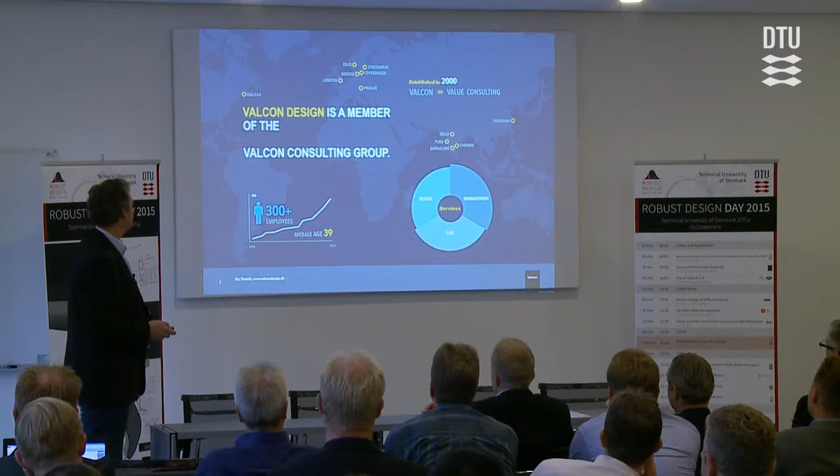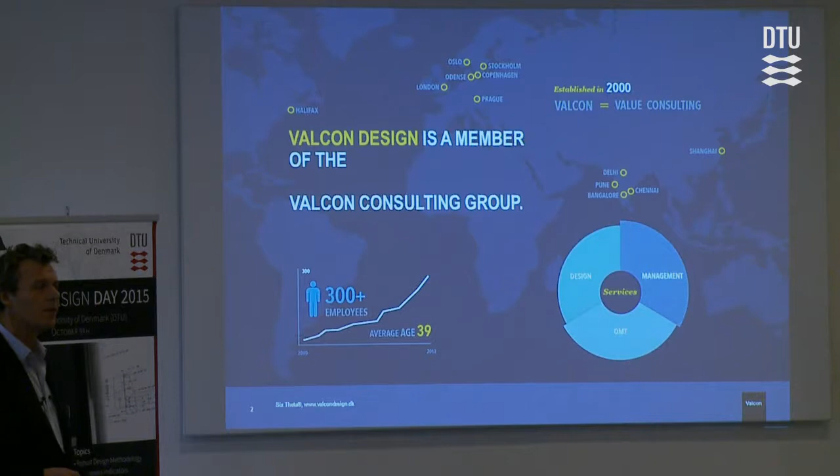This is just very shortly the company that I'm from. Valcon Design is a member of the Valcon Consulting Group. We are 300 people, and we have three divisions. We have management consulting. This is why we are talking so much about trying to measure how good design is, because that actually makes it controllable. Then we can manage it, scale it, train people. And then we have the design department where I'm the head. And OMT, that's another story. They are making ships. I'll not talk about that right now.

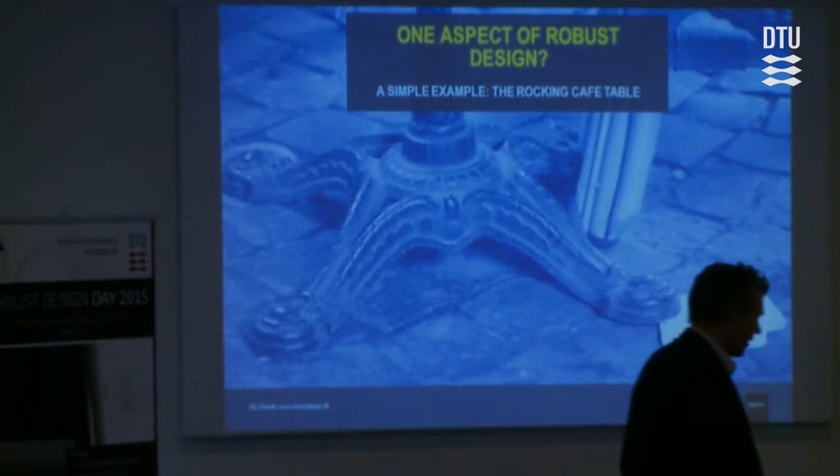Just one little teaser here. Maybe everybody has seen it, but each time I see it, new things are coming up. Because in this little example, one aspect of robust design that I have found is extremely important, I'll not say it's everything, but it's close to, is over-constraints. When we have over-constraints in a design, suddenly we have this situation. Let's assume we had zero production tolerances. Then we could assume we have no problems.

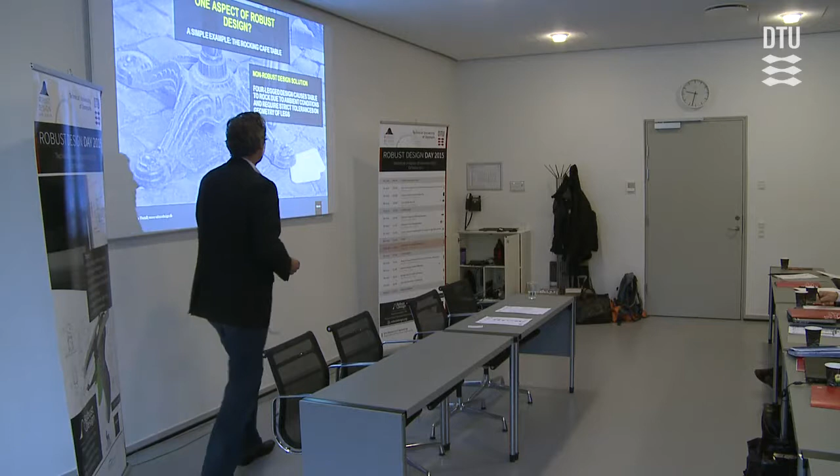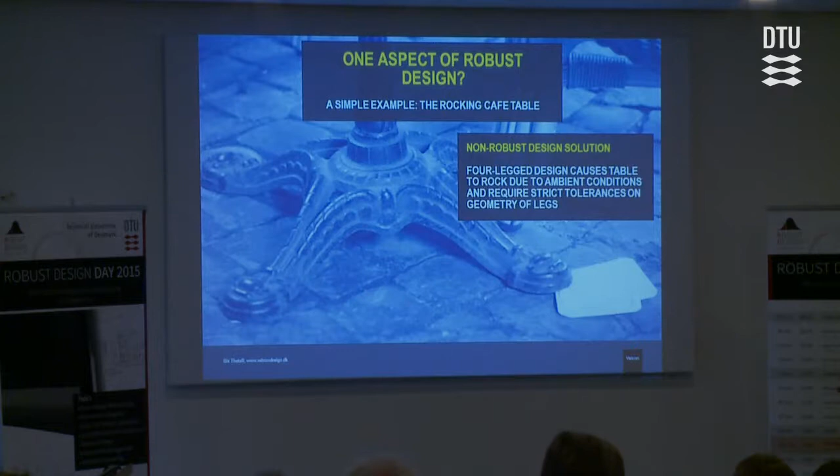No, we don't, because what Thomas is talking about, load deformation, thermal variation, all this stuff will actually try to make this different. And then we have this situation. And we all know it. Each summer we need to put something new in. They're changing all the time. From a robust design perspective, this is a non-robust design solution. It's born like that. No analysis, no simulation, nothing can remove it. It can improve it, but it cannot remove it. And there's a huge difference there.

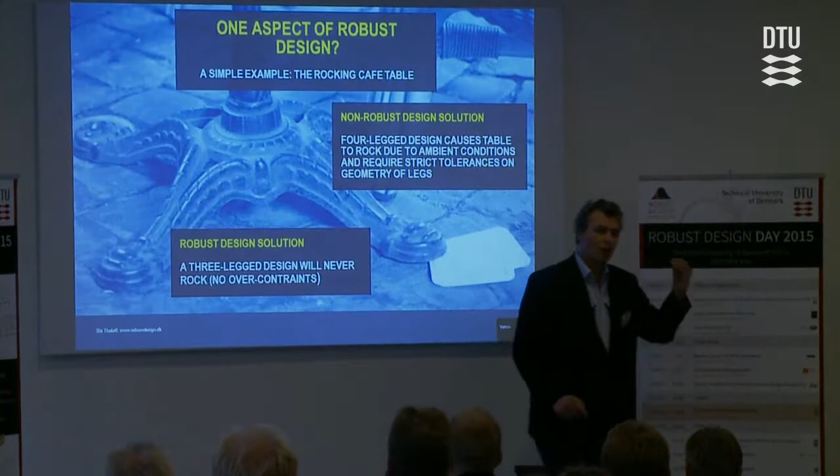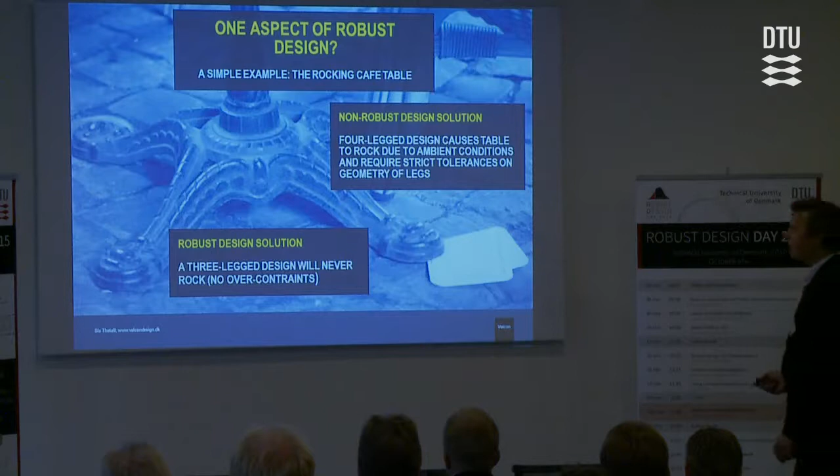So what I'm talking about now is really digging into the over-constraint part. For one, it's simple. You don't need to calculate anything. But it has such a big advantage. So I want to look at one example of over-constraints and how that looks. If we look into such a product in low volume, I would expect that we have a 100,000-leg table. There are so many over-constraints in such a product. My argument is not that we can remove all of them, but I would assume that we can remove around 90 to 95% of these over-constraints.

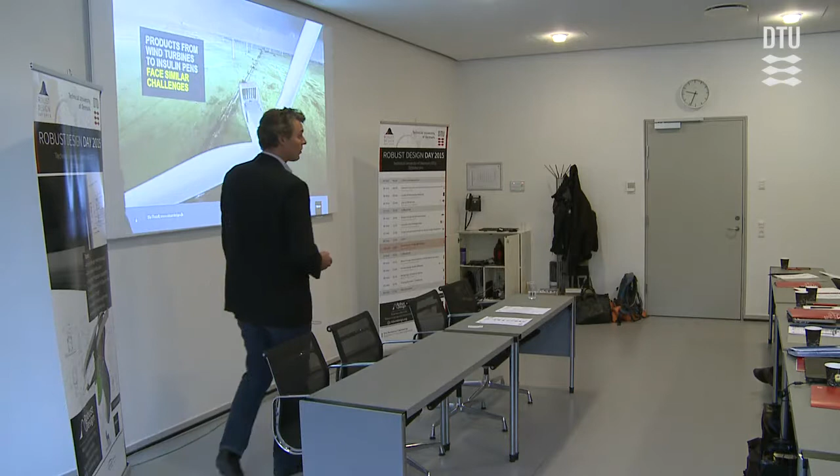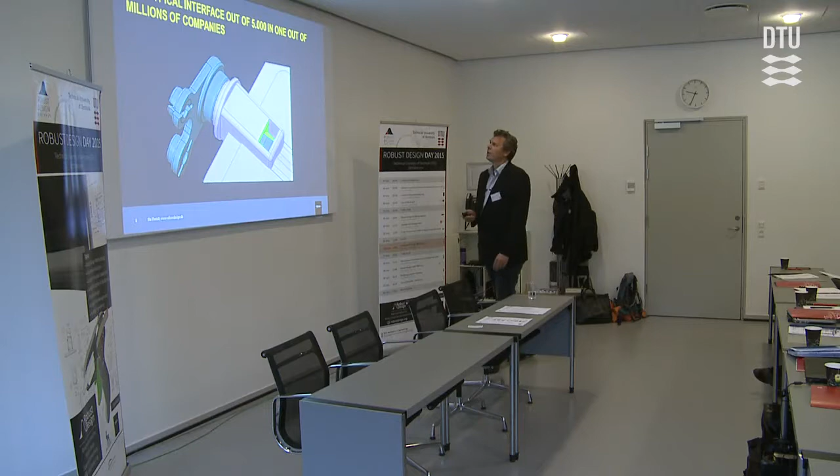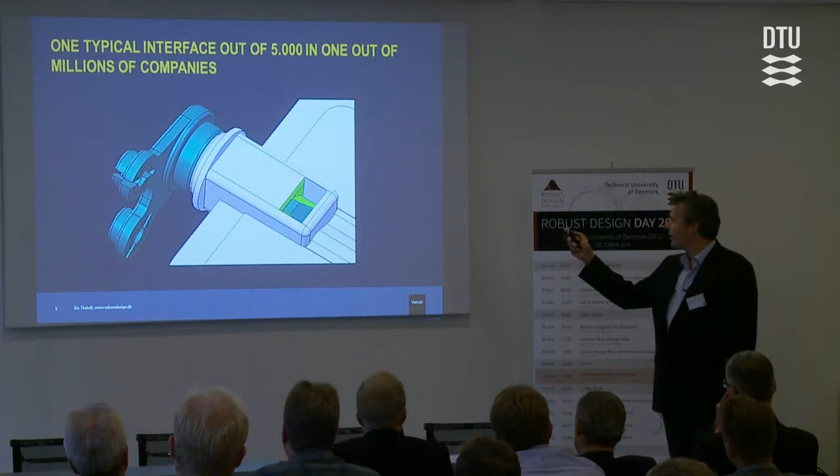Let's dig down to one single interface between two components weighing approximately 5 grams. It's in an automotive company. They're producing 5,000 interfaces like that a year. And I would say it's one out of a million or even more. This is how their design looks today. I have the two components here. I have painted all the surfaces green. These are the surfaces that we need to control to better than 5 hundredths of a millimeter to actually have a good product here.

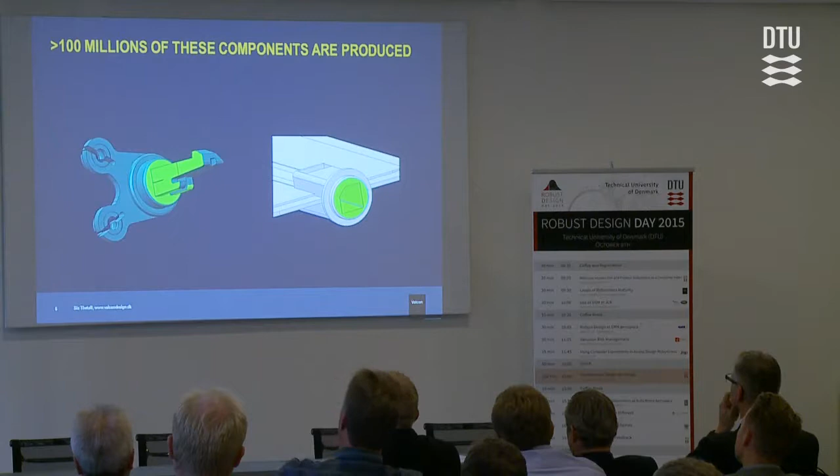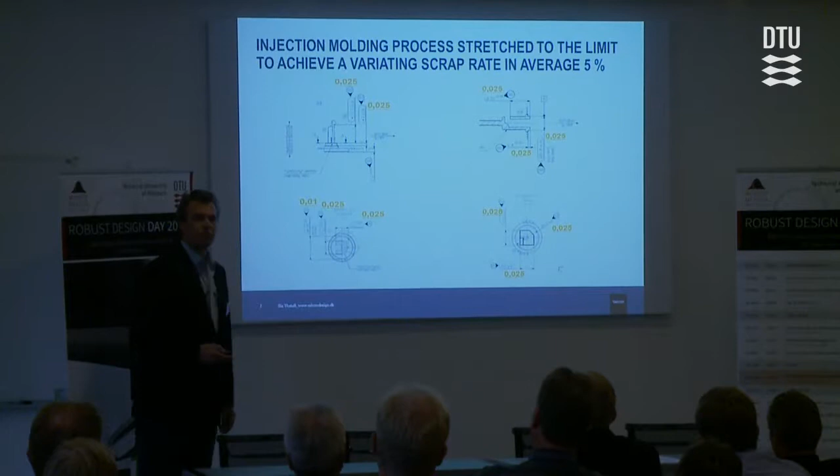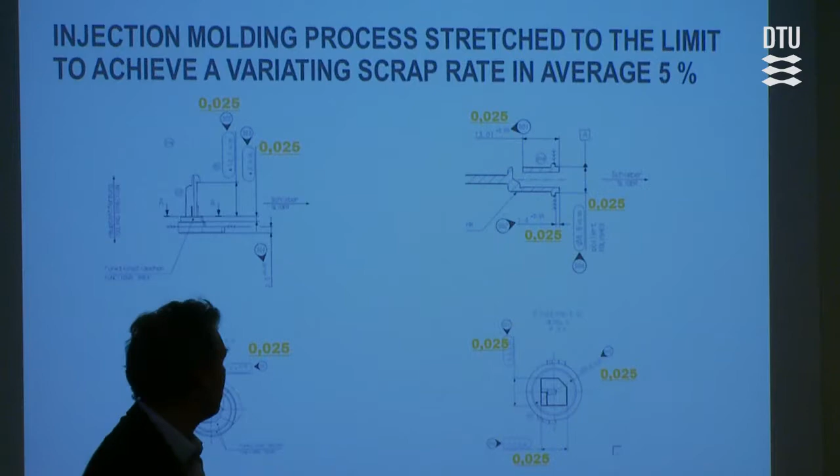Let's look into their drawings. These guys are amazing at production. They are stretching injection molding to a level that I have never seen before. They are able to produce 0.025 millimeters on 10 millimeters in injection molding. Steady production. What they achieve by doing that is a varying scrap rate, on average 5%. That is not a good situation to be in.

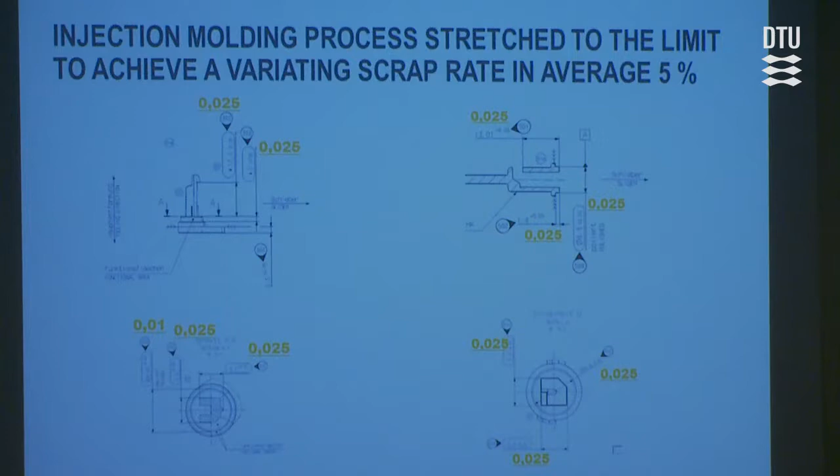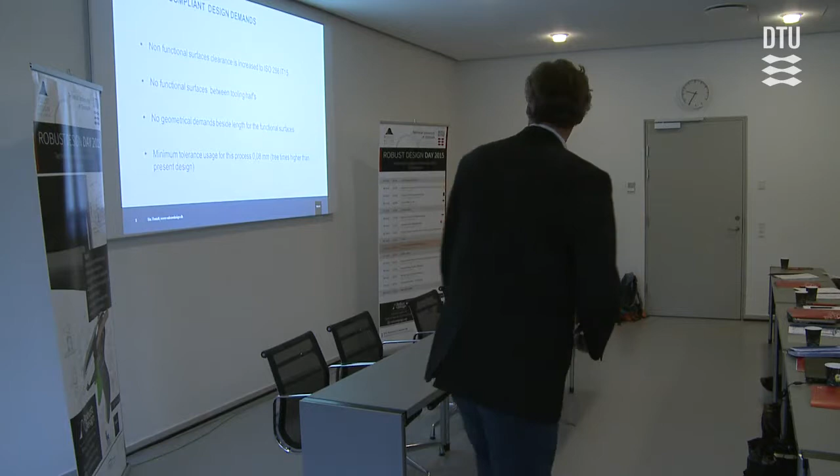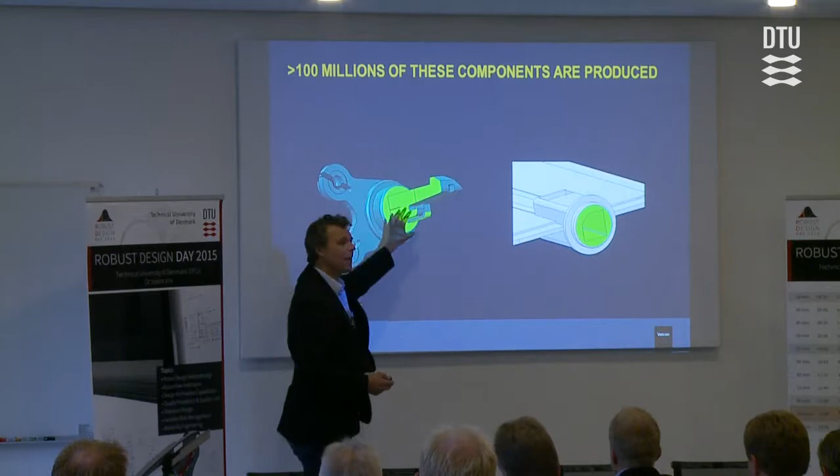Let's look at how this could look from a design perspective. Let's not do any simulation. Let's not do any calculation. No, let's change the way the design looks, because that is what's needed here. No simulation can change these two parts because they are simply wrong. So they have not deserved any analysis, they have not deserved any simulation, they need to be changed. And this is what we do before we start simulating.

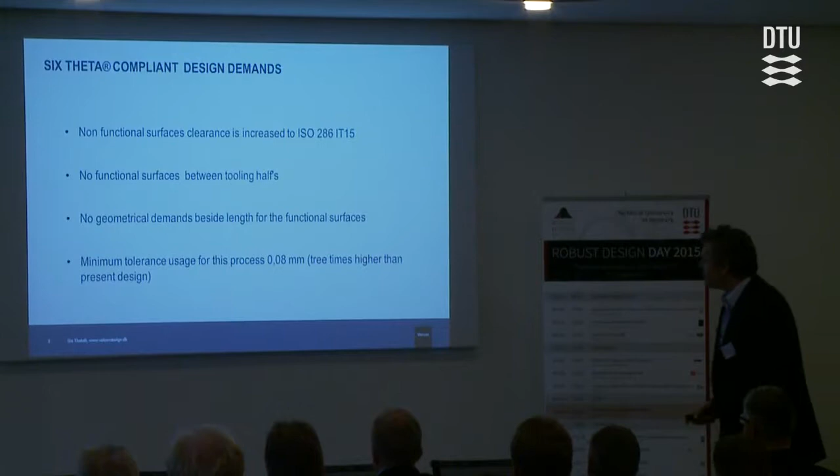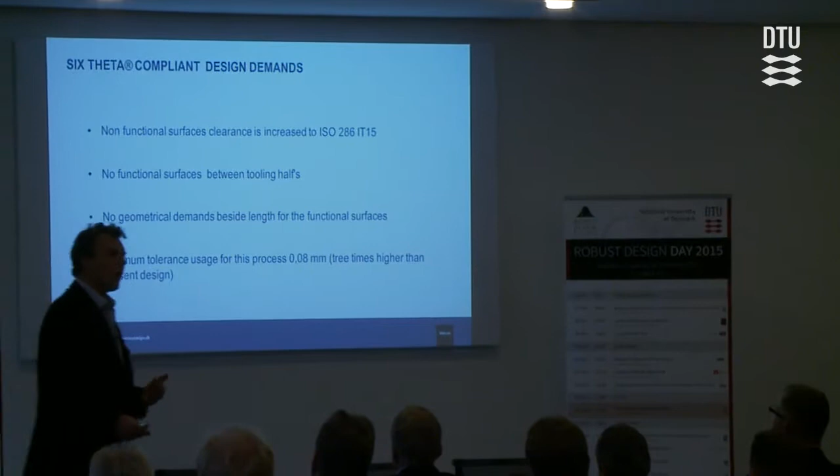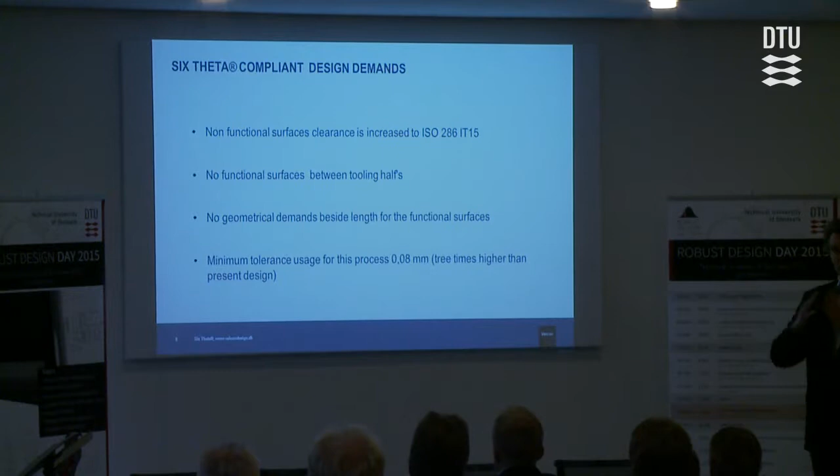So let's set up a specification, because we know what we want to end in. We know what the specification of an injection molding is, we know how that is looking, we know what is easy to produce. So why start designing before we actually know what the result should be? Because we know that up front. We need that all surfaces which don't touch each other, all the non-green surfaces, should actually be to IT15, because that means that we have no quality control on this.

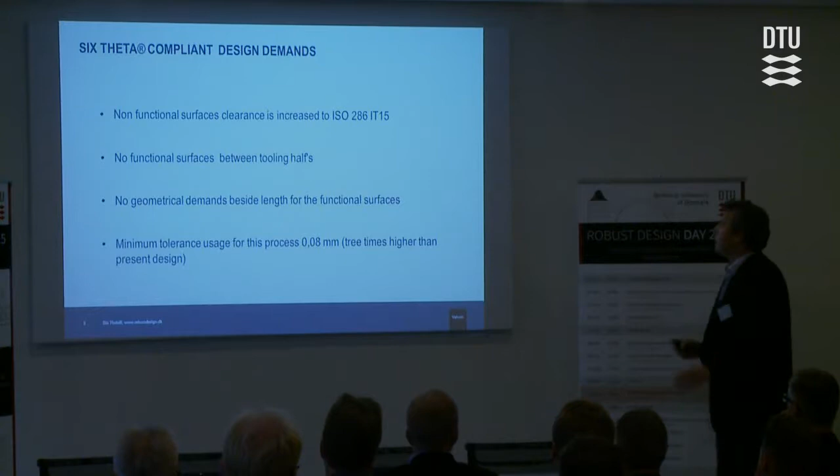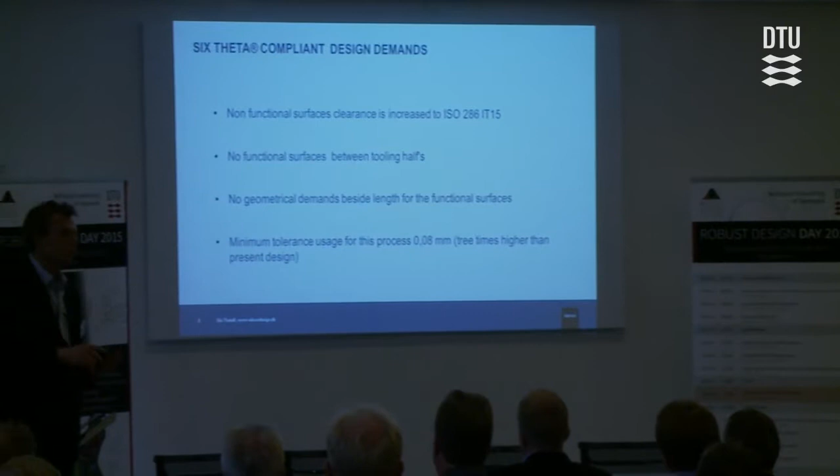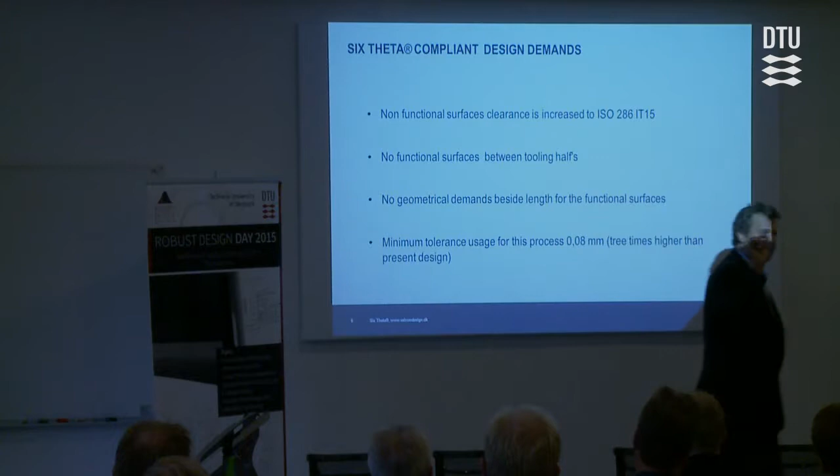There should be no functional surface between tooling halves. Tooling halves in such an injection mold actually have clearance, meaning that we will have play inside. So that is not a situation. We know that from the beginning. There are no geometrical demands beside length. We all know these GPS measurements where you have the roundness, the planarness. It's beautiful signs. They're very complicated. Let's have designs where we don't need any of these.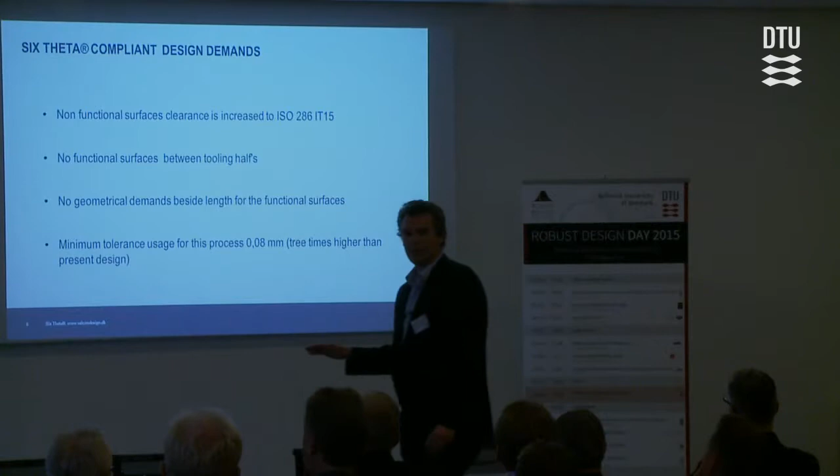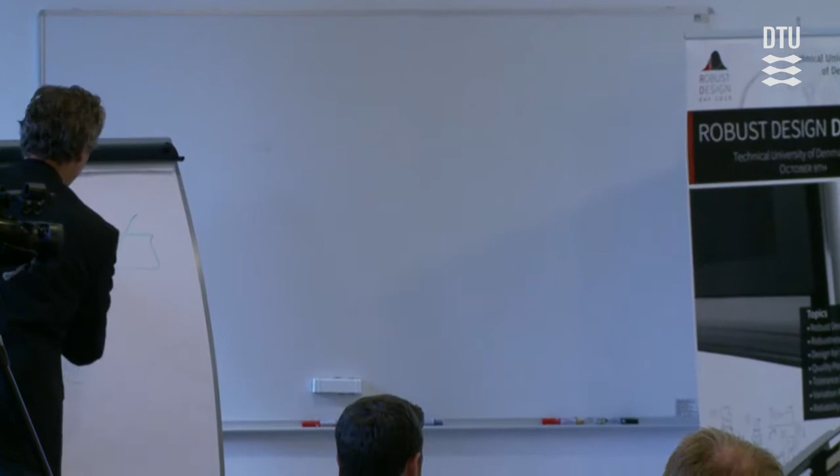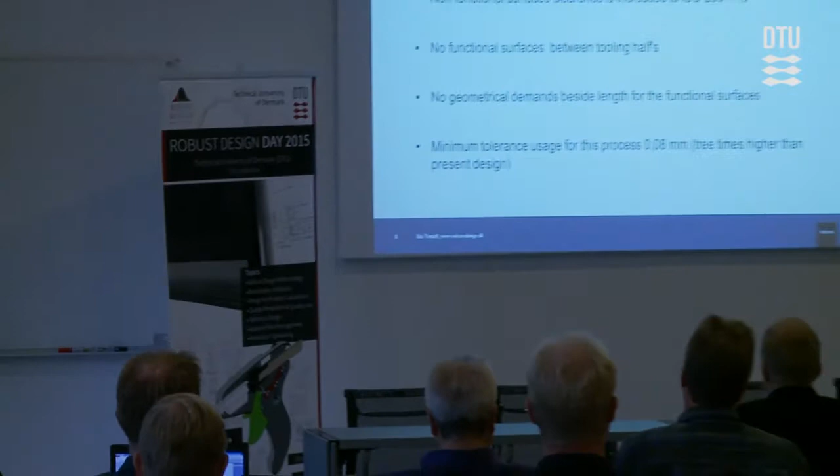Each time I see a design, each time I see such a thing, I'm glad I can read it. Flatness, this one, there's a lot of these signs. Let's just get rid of them. Let's use them where we want, but let's make designs where all these are non-needed. So this is the goal for the design. Let's look how this looks. This is how it's looking.

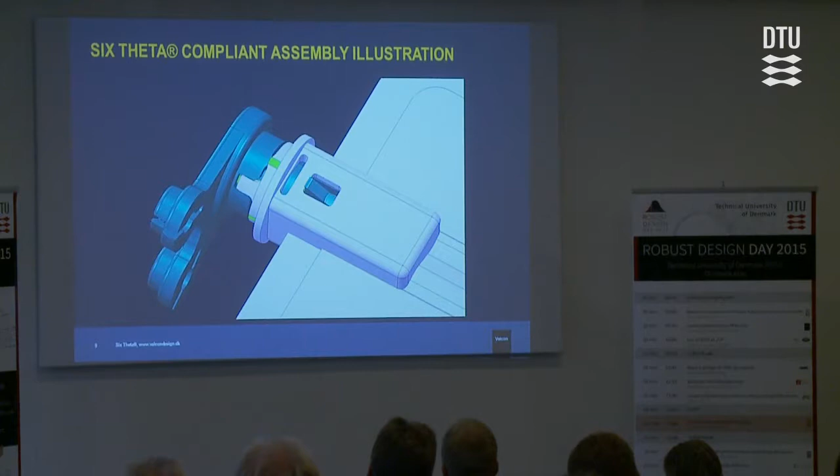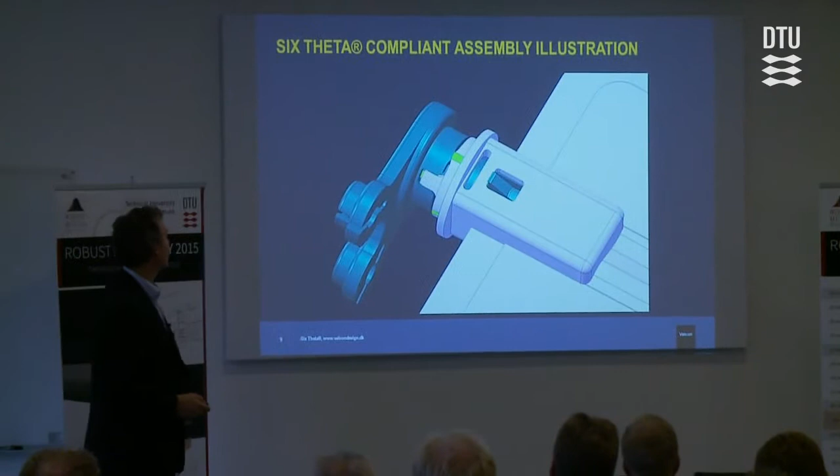So this is a compliant solution, and back to your KPI, this is actually a solution which will score very, very high. It will be insensitive to temperature, it will be insensitive to load deformation, it will have a totally different story of tolerances. But I will come back to that. This is the part we had on the left side, which was demanding all these tolerances. This is the part on the right side.

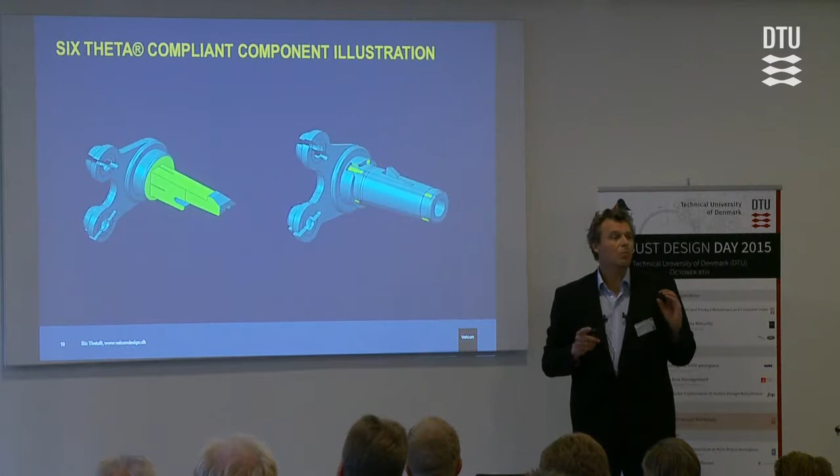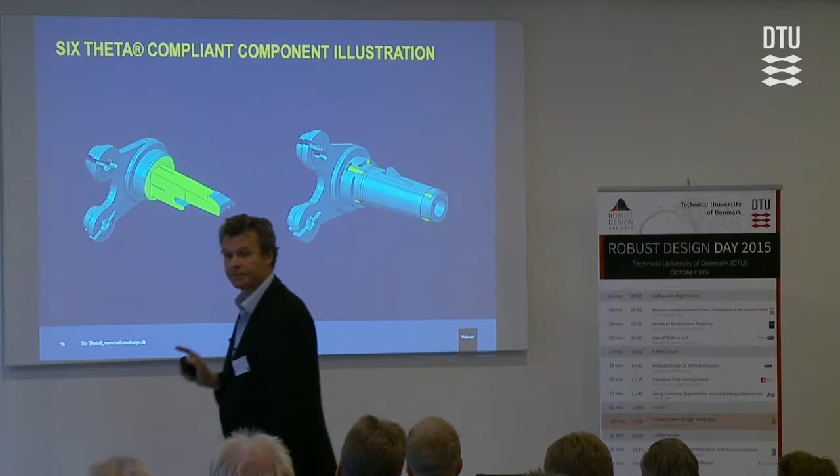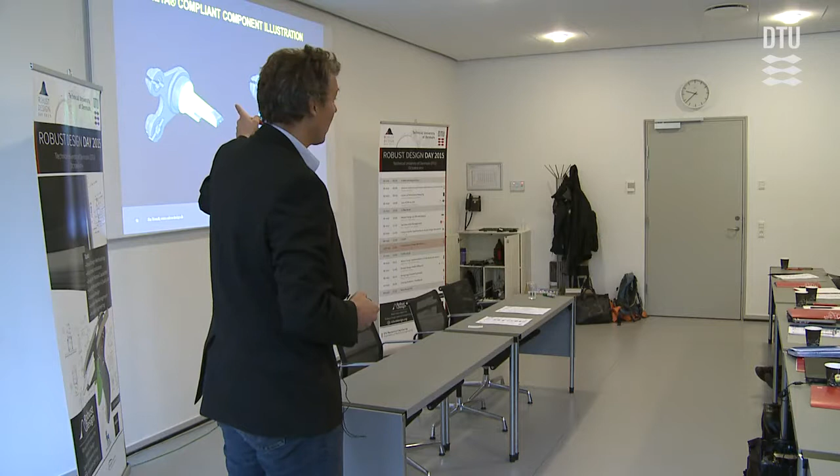Now look how small the surfaces are. If you look into a Lego block, they are there. I would claim that everybody thinks that Lego is the best in the world due to their production. I would claim it's due to this. I'm not sure they can produce the tolerance I just showed you in this automotive company. I'm not sure about that. I'm actually sure that they don't need to do it because they have such a beautiful little dot in their Lego block. It's a beauty. Can't help them. They're just damn good at it.

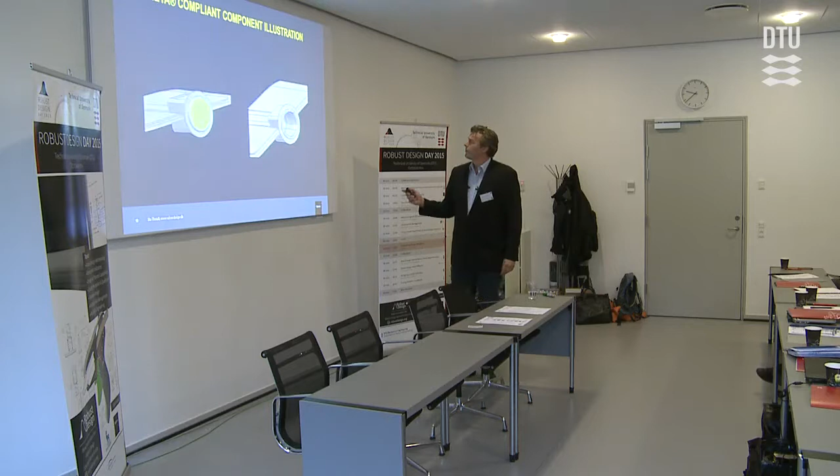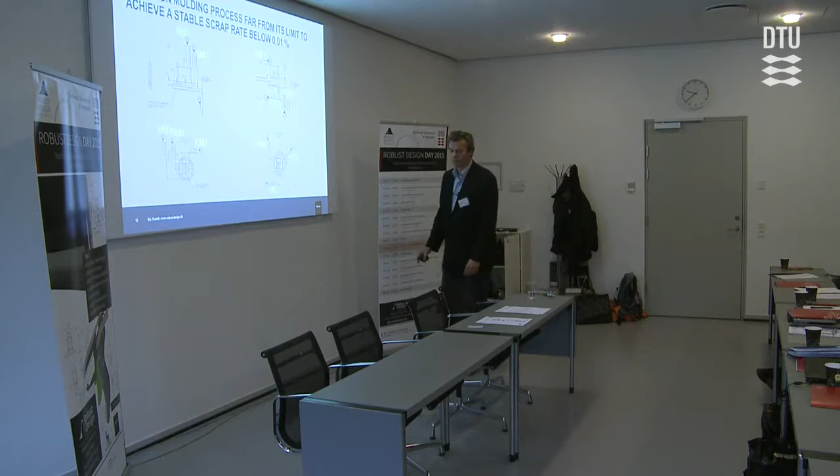This is the next one. On the left side, we have the original. On the right side, we have the other one. Let's look at the drawings now. This is how it's looking. We haven't made any simulations. And we have now a situation with the scrap rate below 0.01, and we have tripled the tolerances.

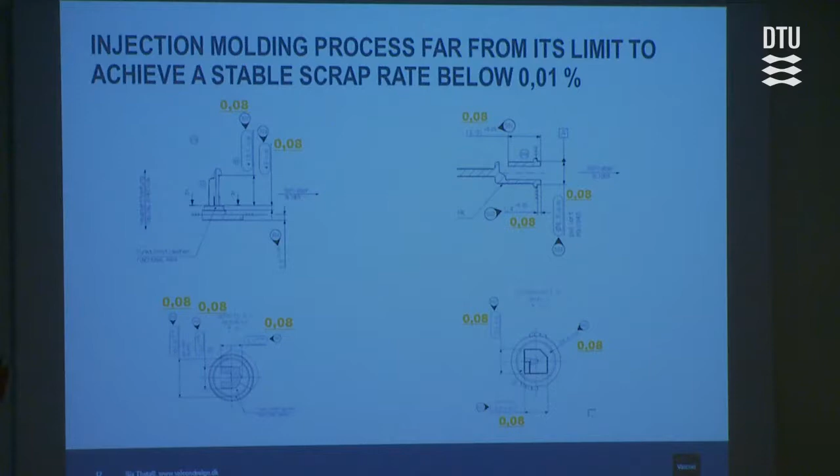This is live. And when we then start looking at how the components are out there, how the components are in general in the industry, because this is just one example. In this company, this is average, how the components are looking. This is just another example, an old example, I've made them myself, of how components are looking when we design it this way.

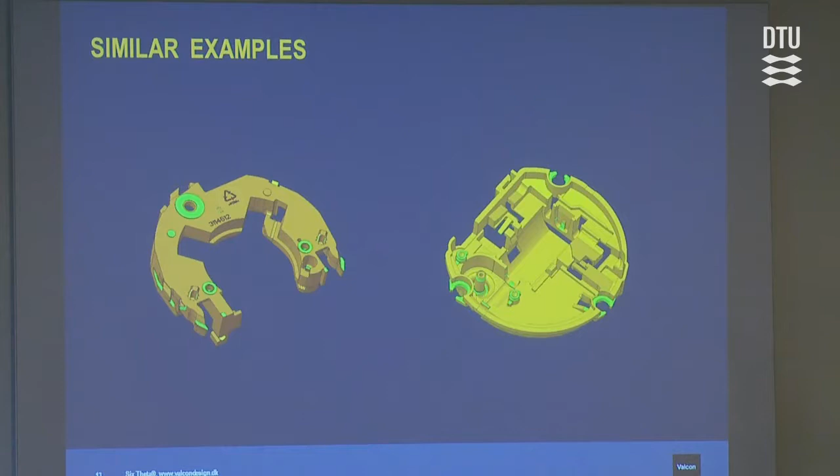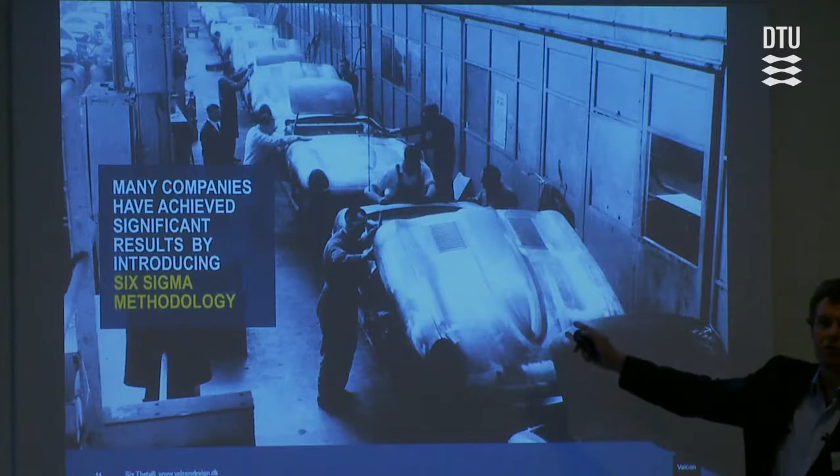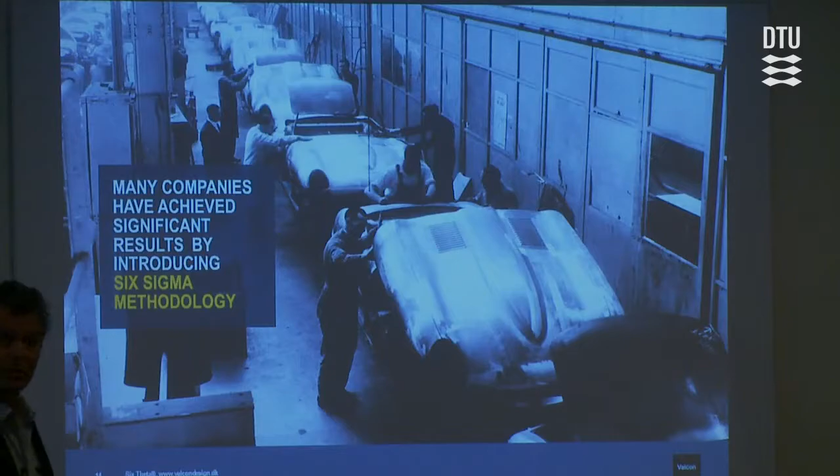If we look into the companies, we can have huge results of implementing Six Sigma where we really bring down the variance. Huge results. And it's very effective, and we should do it. Personally, I don't like the discussion of whether it's this or the other, because it's both. But you could imagine that, back to this one, it's a little complex to actually do that. There are some measurements to control here.

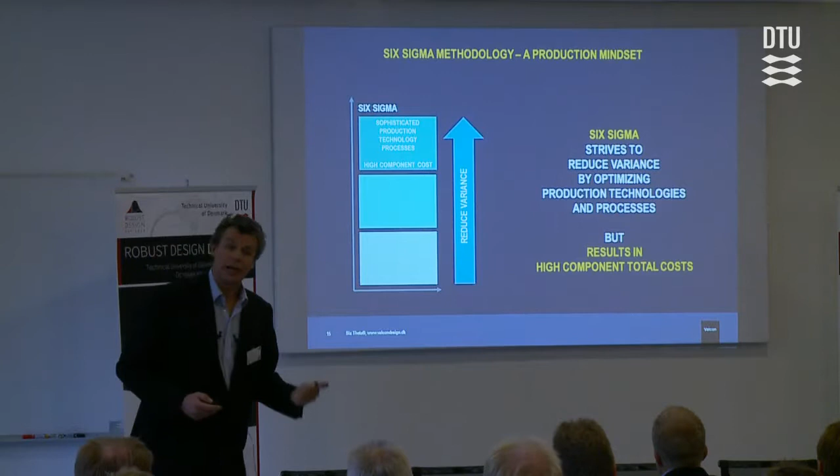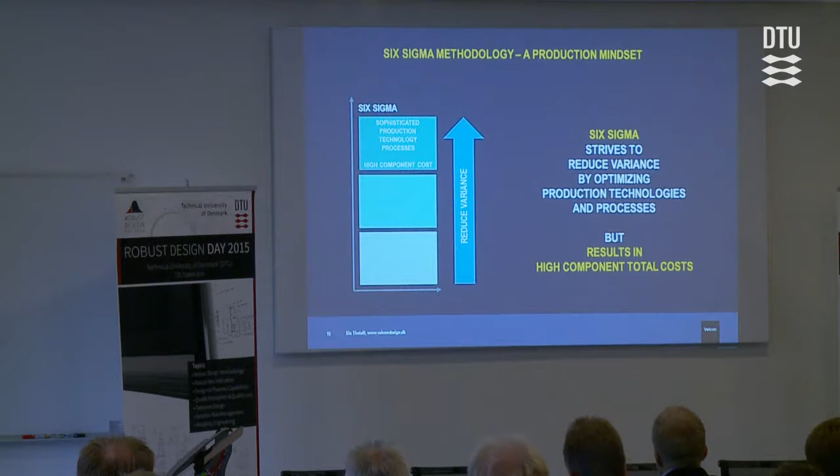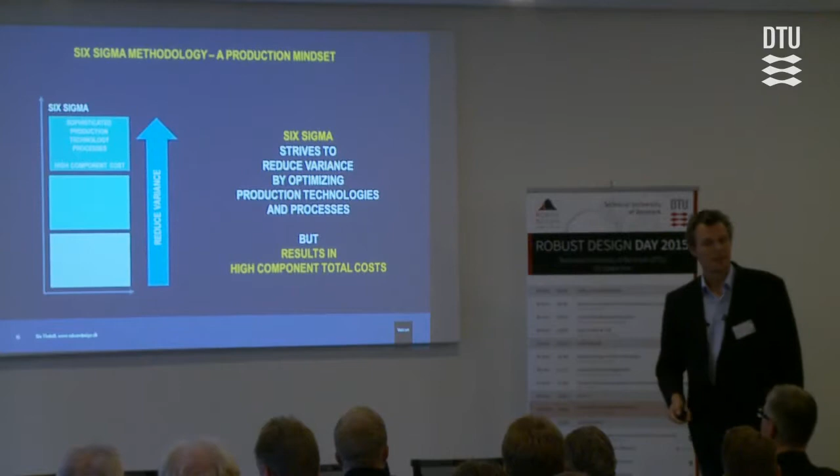So what happens if we don't have the right design is that cost is going up. Cost of inspection, and I'll actually also claim innovation is going down. The reason for that is that if you get the experience that each time you do something new, things go wrong, you'll be in a position where the best is not to do anything new. I can understand that, because the guy who made this solution I showed has worked with that solution for 1.5 years with no progress. Ask him to do a change. He said, no. Now it works. I don't know why. I will not change anything. So this is actually hitting our innovation.

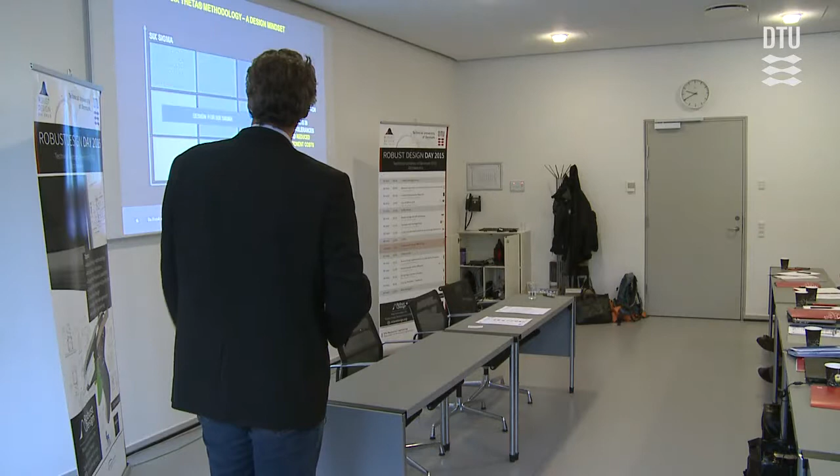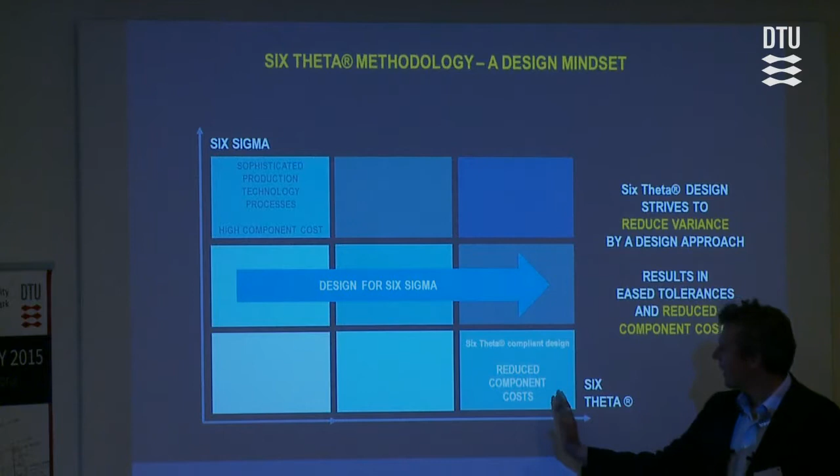So what we are saying is, back to the scale, let's work out here. Let's put some metrics on what is good design, Six Theta compliant design, which I just showed you some examples of. How's that looking? And then let's go into this and secure that we have a very robust design. We call it Design for Six Sigma. There's a lot of good work on this.

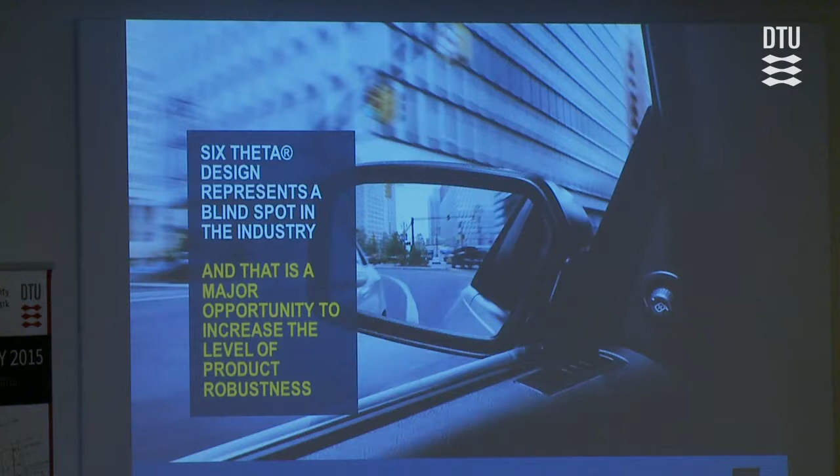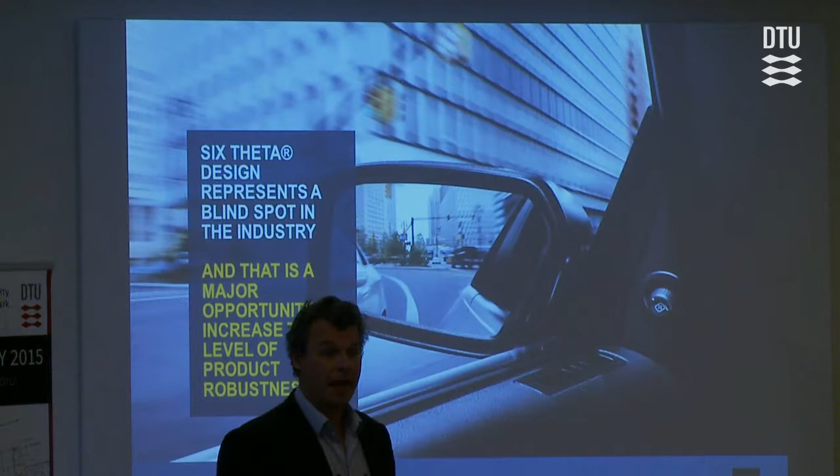I'll claim, on the basis of 20,000 interfaces, I'll come back to that, that in the industry this is a blind spot. It's not out there. We can talk about processes. We can talk about doing it all right, but when we go out there and measure the result, it is not there. Sorry to say, it's not out there.

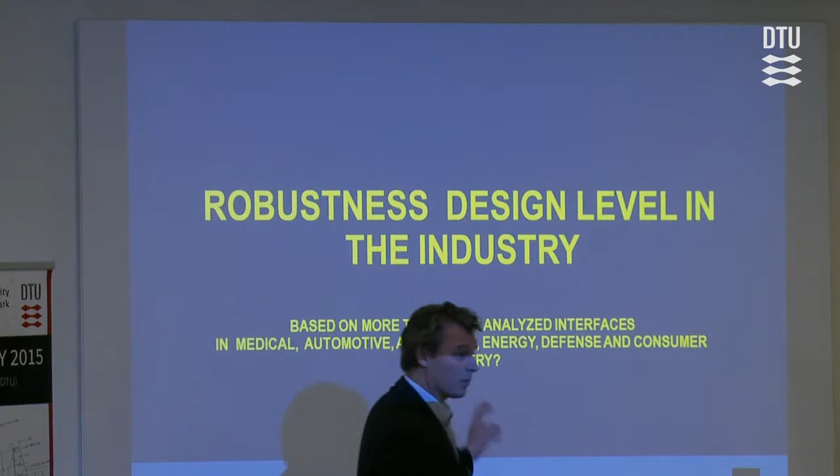So we have analyzed 20,000 interfaces in medical, automotive, aerospace, energy, defense, consumer industry, and some others. And we have made a scale. It's a very easy one. Here is an example: we have 2 components for a hearing aid. These 2 components should just be fixed together. In mechanical language, we have 6 degrees of freedom, 3 translations, 3 rotations. It's nothing more.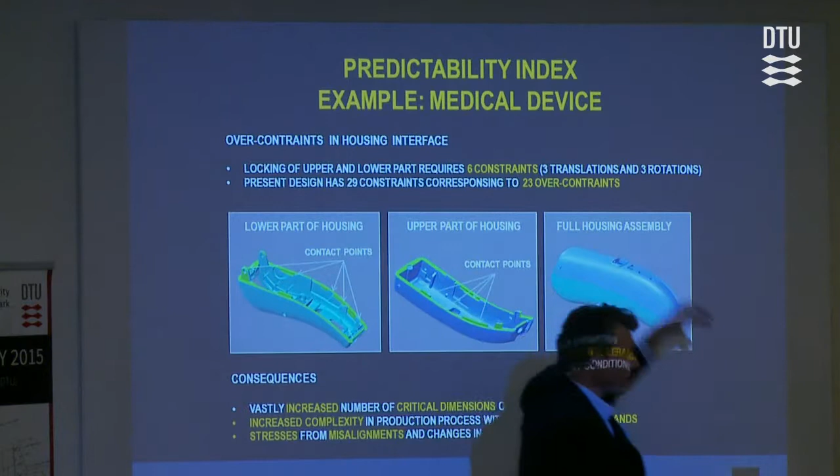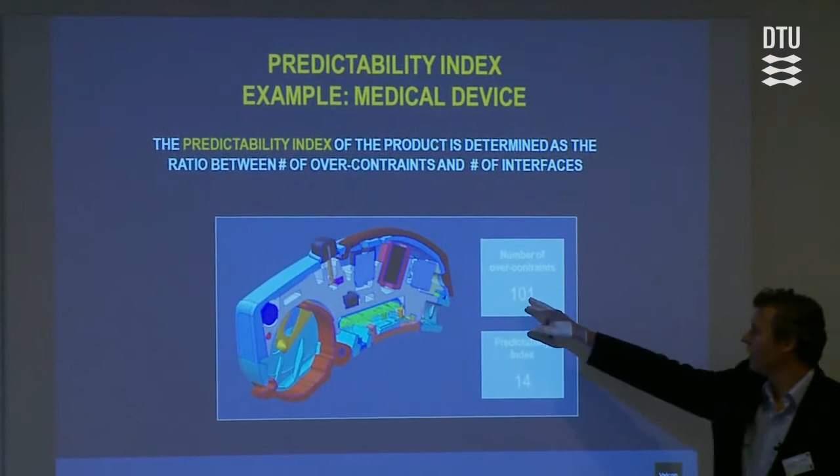There's just a lot of them, so this is where the complexity comes in. In this situation, we need 6 constraints to lock this. 29 are used, so we have 23 legs on the table here, too many. Looking a little further, the total number is 101. It's not that much; actually, it's about average in the industry. And the index we made is very simple: you take this number and divide it by the number of interfaces. You now have an index of 14. Let's come back to that.

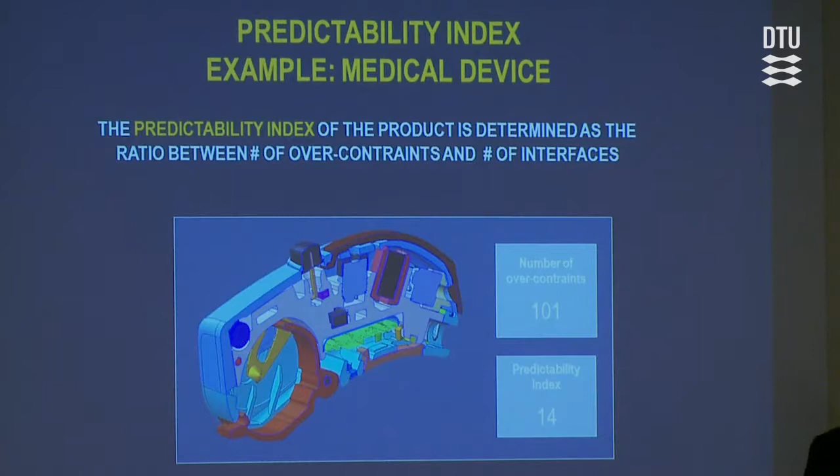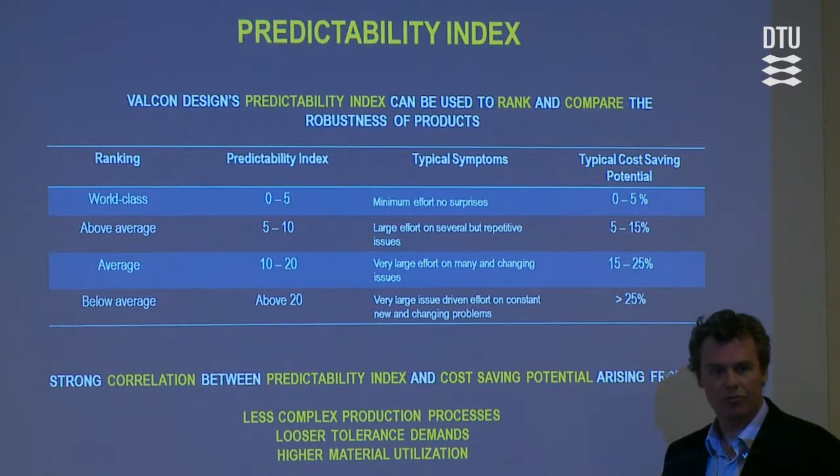Looking at our customers and how they see the situation, we have defined this ranking scale. Let's start down here. Below average, above 20, we have very large issue-driven effort on constant new and changing problems. I will say a lot of engineering is in that situation. Then we have very large effort on many and changing issues, large effort on several but repetitive ones. Now we come to some control, but we still use a lot of effort. And of course no surprises, maybe a little too populistic, but at least as the goal, we should be there.

When we look at the cost saving, this is the average we see, because when we jump up, we can really lower the cost, because the inspection demand is really going away.

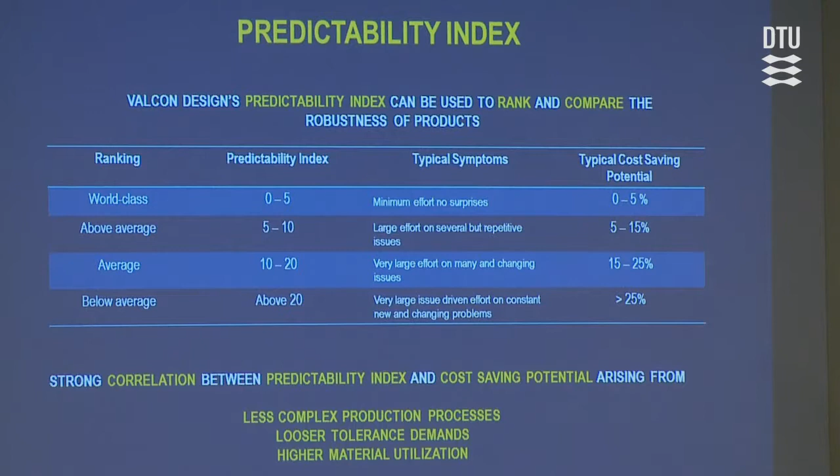I noticed your green contact surfaces. They are large where there's over-constraint, and very small in your ideal solution. But could that not be a problem with deformations and local overload, which can give cracks, for example in plastic parts? Yes, it could. So there are issues beyond your index? No, but I'll come back to that. That can be an issue.

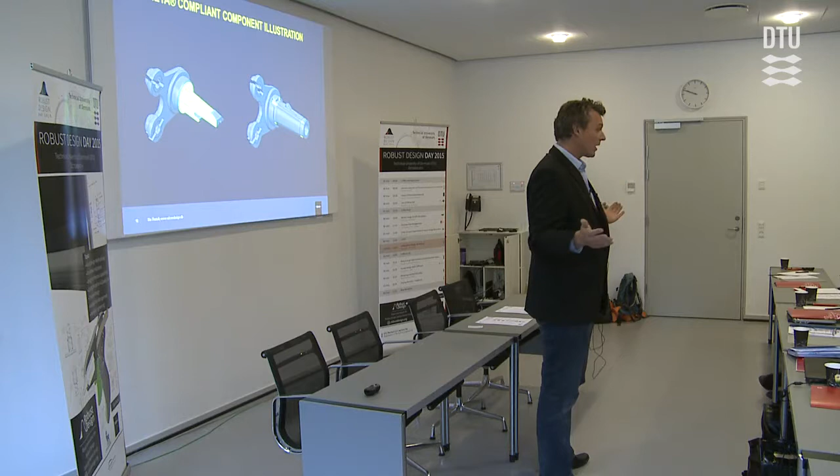This is level 2. So now I suddenly go from, is it rigid or not? And then I find the over constraint. And in these over constraints, we apply what we call a stiffness matrix. We multiply a stiffness matrix with a movement matrix. When you do that, you get a reaction matrix. And then we calculate on the reaction matrix, finding out, are the parts now breaking, or do we have some other problems? And then we start doing solutions on level 2.

If we can't get that to fix, we go to level 3. In level 3, we go to the situation where test, simulation, and geometry should fit. And then we are finished, and then we have a verified design. So this is, how can I say, the process behind. Yeah. Yes, I totally agree with you.

I've been working with these types of things for many years, a lot in the automotive industry, and I've seen that in the automotive industry they use locating schemes. They know where to put the contact because that's where you distribute variation. But if you go outside the automotive industry, it's totally unknown. They don't know about 6 degrees of freedom, and this is 6 degrees of freedom. And this is nothing that you can discuss. It's not a social problem. No, it's not. It's non-discussable.

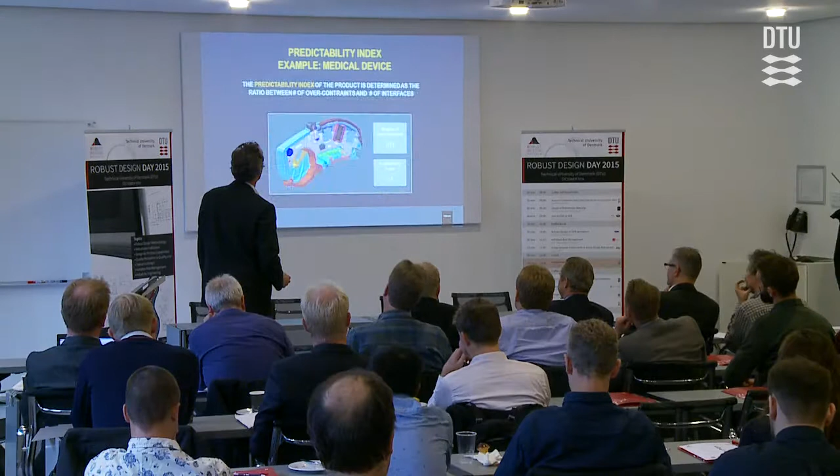So when you analyze all these interfaces with all these companies, do you see that in some types of business, some industries, they understand these things, and in some it's totally new? Yes. I feel personally that it's 20 years difference between some of the companies. I see exactly the same. And to be honest, I also see another thing. I think we were better in the old days. Yeah. When we had real engineers.

Sorry. I have analyzed clocks from the 40s. And the writing machines, they are damn good in designing. Unfortunately, they didn't have that good a production system. But maybe that was why they were that good. Because have you seen what production can do? They can do a press fit of a gear wheel with 1,000th of a millimeter in difference. It's amazing what these guys can do. But why should we use it? I don't think we should use it.

But back to your question. When we look in the automotive industry, this is where we have seen levels up here. Not in general, but we see it. Most of it is above average, and very seldom there's one or the other. Because what we see is that even in automotive, it's not really controlled by top management. It's more built into the organization, it's a culture, and some of the young guys suddenly forget it a little bit. So we see the automotive up here.

I would say the best score we have ever seen is a 2 for automotive, a water pump for a car. Then we see most industry down here, and when we go to, sorry if there's any, machine builders and these things, they are down here. Molding tools, something like that. They are very low on this. So we see it, and we can track it. Yeah.